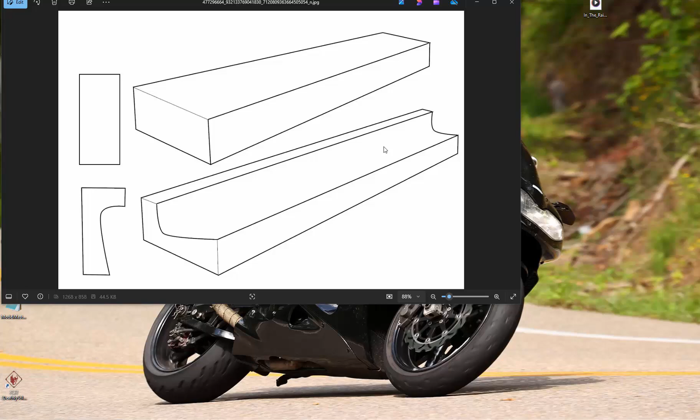So we're going to jump into Aspire real quick, and I've already got everything we need laid out here. I just basically freehand drew this for the sake of this video. The one thing we have to be aware of on this profile is we cannot have an undercut. What does that mean? If this arc goes like that, the tool cannot reach in there because it only goes straight up and down, so you have to make sure there's not an undercut there.

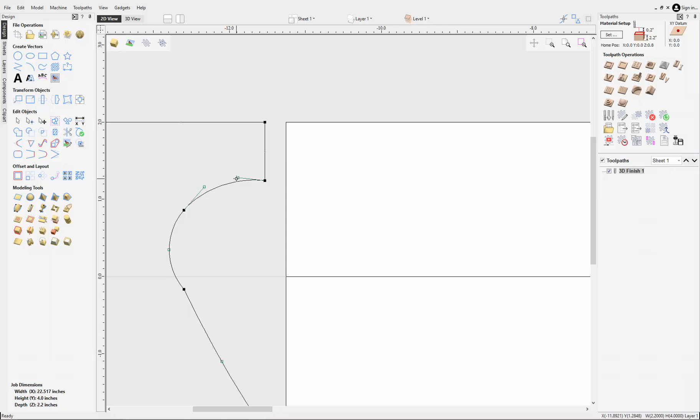So we'll do something like that. To make this shape, all I really did was draw a box, press N for node, delete this end of it, come in here and create this profile, and you end up with that.

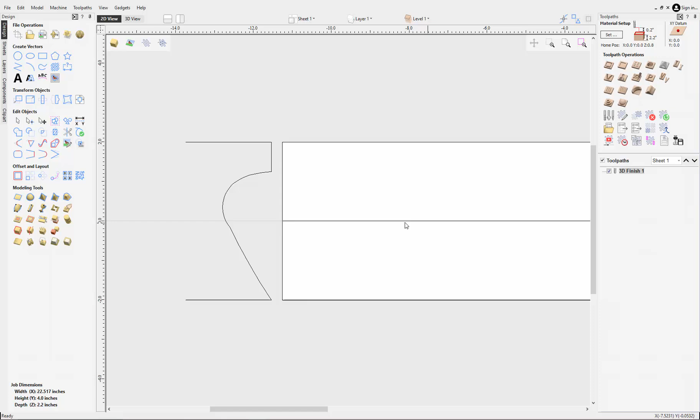Normally I would do this as a 2-rail sweep, where you'd have a rail here and a rail here, and then you'd use this profile and it would sweep that. But the new Aspire's got this really neat tool here. It uses a center line and the shape of your cross section.

The thing to make sure of here is that you set your material up to the physical size that you want. So here's what I've got this set up as. That's good. I've got a line drawn here in the middle - I just drew a line and pressed F9 to center it. I can't press F9 now because it will stop my recording software.

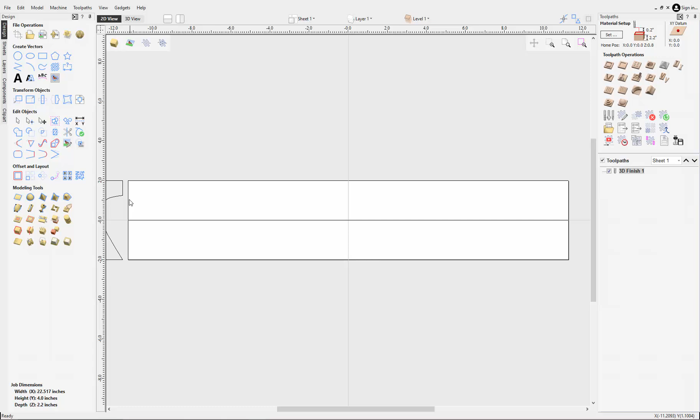So that's it. Then we're going to need a vector bounding box for our toolpath. The one thing I'd recommend is when you make this, make it at least the diameter of your tool longer than the cut. Otherwise it'll start here and you'll have a scallop on this edge that you have to remove manually. But that's neither here nor there.

So I am going to choose my center line. We're going to go to this tool, use selection. I'm going to click on the cross section and apply. And guess what? That is literally it.

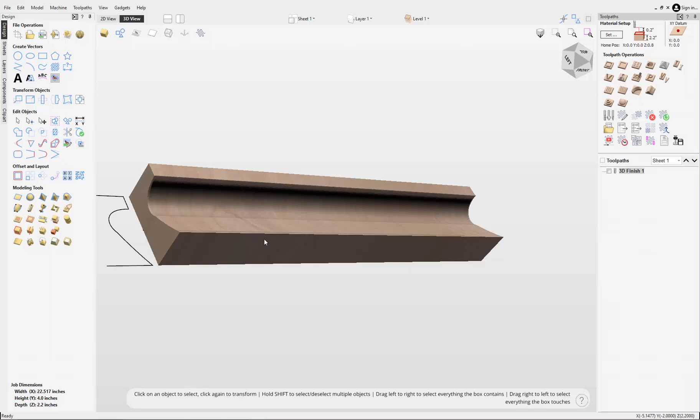Let me turn this toolpath off over here. So now to create the toolpath, what we're going to need to do is give it a vector to constrain it - it's going to be the size of this. That's it. I'm just doing a 3D finishing toolpath here, but you can do a roughing the same way - rough it out and then go to a 3D finishing toolpath.

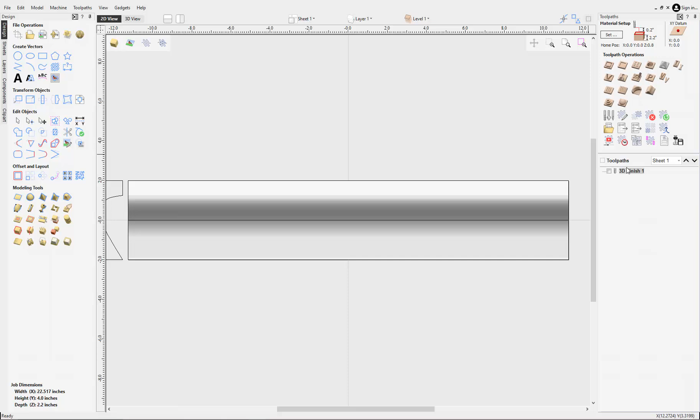So all it's going to do is just raster it. And I used - let's select - a 1/2-inch ball nose. Is it even going to let me have it? It's not even going to let me have it because I don't think I've got it set up. So we'll just use the 1/8 inch here.

Selected vector - model boundary would work as well. And we're just going to do a raster, so it's going to go back and forth instead of a center and spiral out. And calculate. We need to select our rectangle.

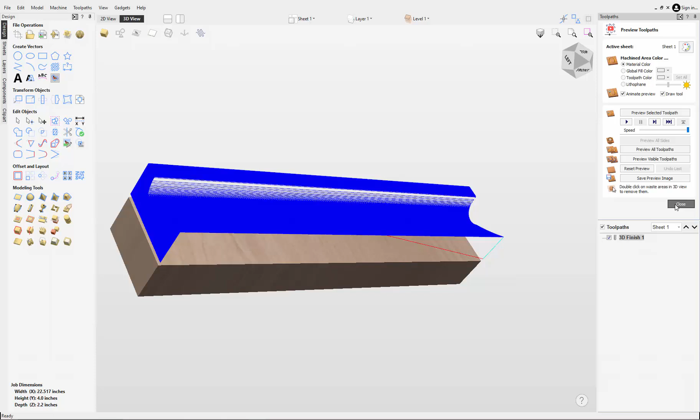And there we have it. Does it look like it? Okay, it looks like it might go down the sides. So what we will do there is look at our selected vector and just make it a little bit shorter.

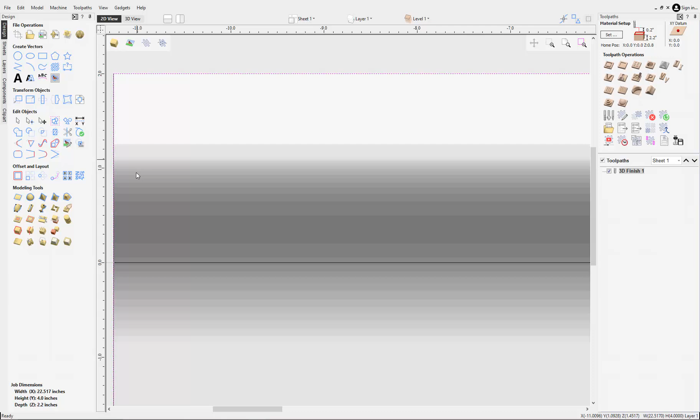So T for transform - just bring that in. Let's go look at the other end since I just quickly drew it. If it overlaps the model, it will try and go down. All right, close that. Let's double click on that again. We've got our vector selected. Calculate.

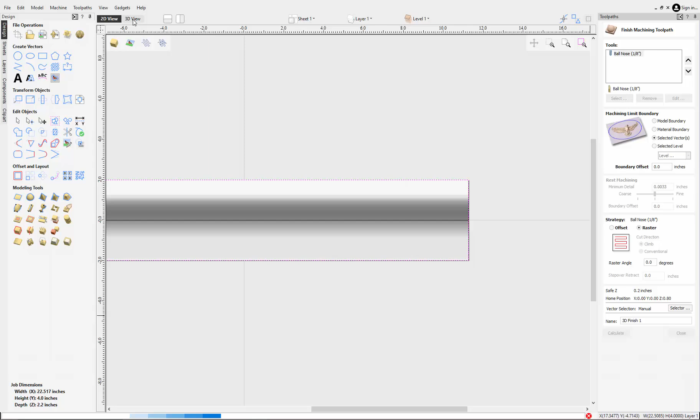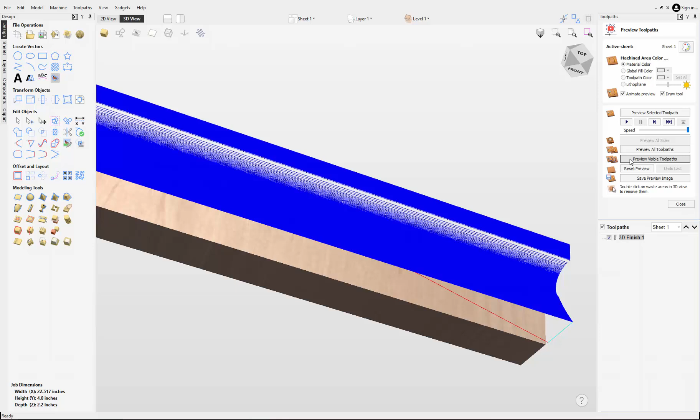So now we can see it does not go down the side of the model. And that's basically all there is to it. But like I said, let's preview this. Let's see, do we have an offset set up somewhere?

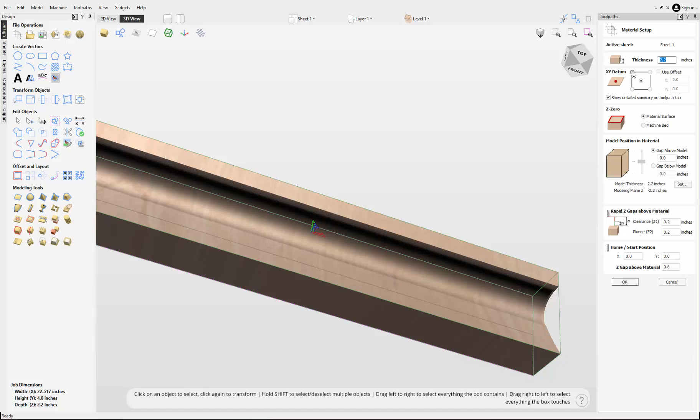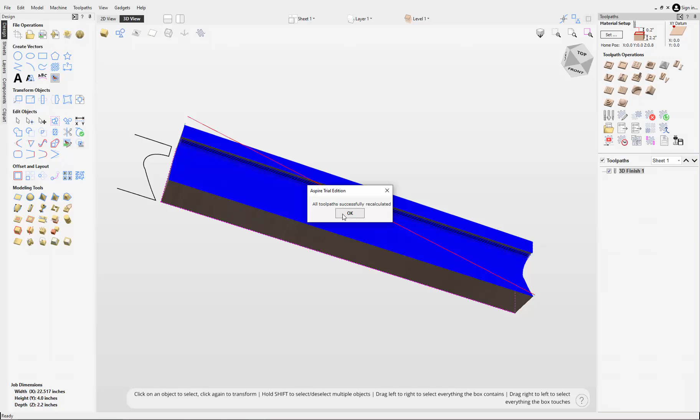Let's change that from the center to the back left. Okay, so that's sitting down there. Now we can see that it's actually sitting on the model. So let's preview the visible toolpath. There it is.

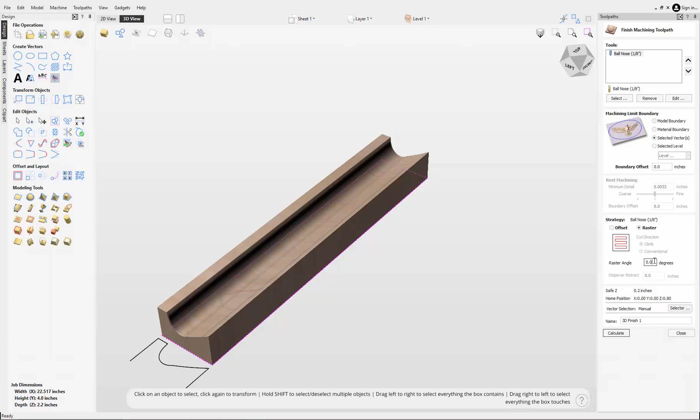And if we wanted to, I think we have the option - if we're going to do a raster, we can do a raster angle of 90 degrees, which instead of it going long ways - let's reset preview - it's going to go front to back. So I hope this helps.